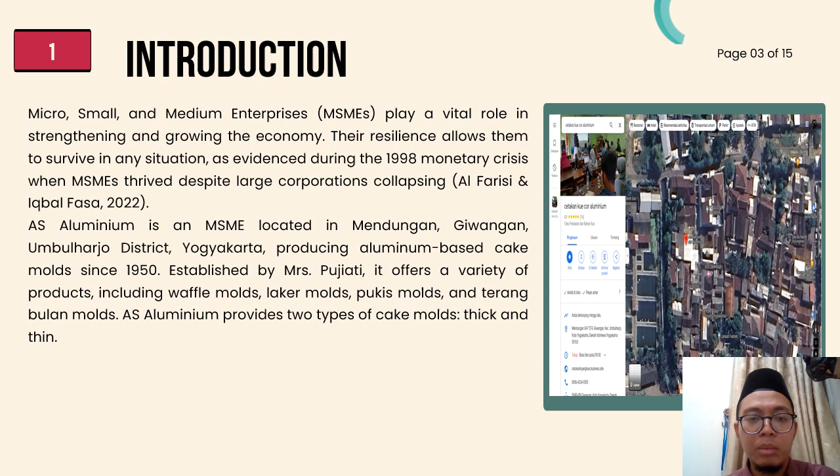In AS Aluminium, some product defects occur, leading to loss for the business. Defective products can negatively impact the company's reputation with customers. To address this challenge, incorporating sustainability goals such as responsible consumption and production can help minimize waste and improve product quality. Additionally, enhancing decent work and economic growth through efficient production processes can reduce defects and support long-term business success.

Quality is the most crucial factor in achieving success and growth, both locally and globally. By integrating industry, innovation, and infrastructure, companies can foster technology advancement that improves production standards and reduces defects. Defects found in aluminum products include holes, rough surfaces, and unevenness issues, which can be addressed by adopting climate action and optimizing energy use in the manufacturing process, contributing to both environmental sustainability and product improvement.

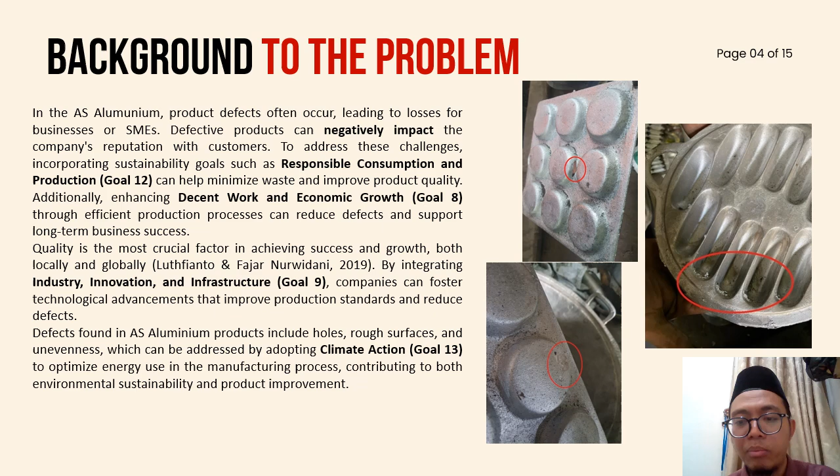As you see in this picture, this is all types of defects in the AS aluminum product.

The data show that both cetakan tebal and cetakan tipis have defect rates significantly higher than the target 2%. Cetakan tebal has an actual defect rate of 8.26%, while cetakan tipis shows 8.52%. This indicates a substantial deviation from the target, with cetakan tebal more than 6% and cetakan tipis more than 6% gaps. So this condition needs improvement in the quality control process to meet the desired standard.

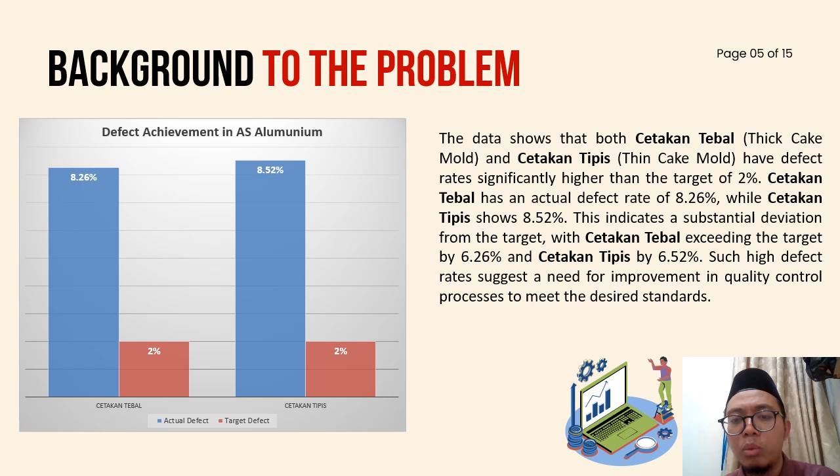Then in the next phase, measure phase, we collect the data from the defects and calculate the DPMO, defect per million opportunity, and the level of sigma.

Then in the define phase, we identify the defect in the production process, and then we try to improve using brainstorming and 5W and 2H, to determine how to improve the process to reduce the defect.

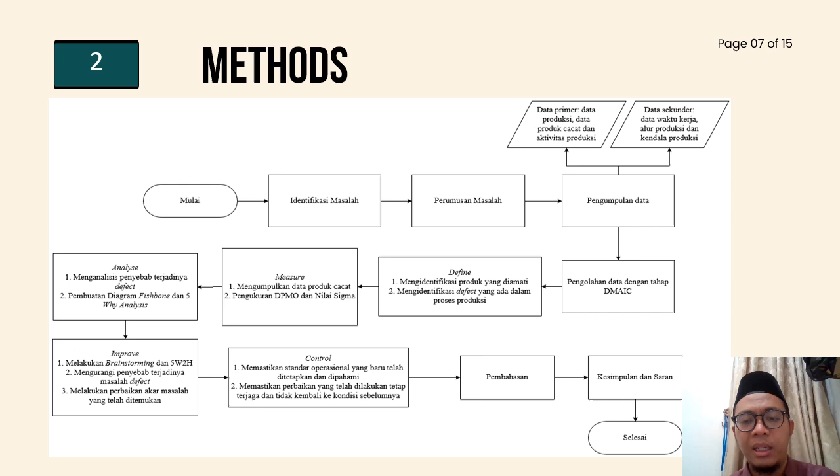Then in the last phase, the control phase, we make sure the SOP, standard operating procedure, the new SOP, is defined and implemented in the process. And then the last is conclusion.

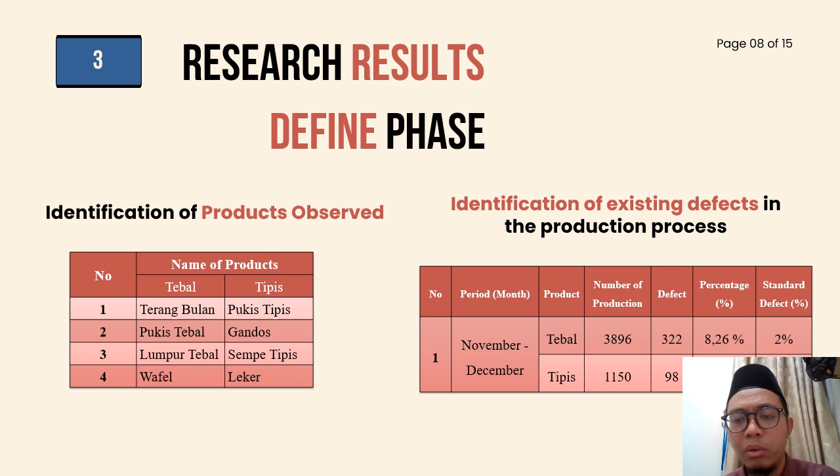In the first phase, define, we identify all the products where defects occur. For example, there are products with defects: terang bulan, pukis tebal, lumpur tebal, waffle, pukis tipis, gandos, sempe tipis, and leker. From the observation, we found all the products occur with defect rate more than target.

Then in the next phase, the measure phase, we calculate the DPMO, defect per million opportunity, and level sigma to know the baseline to conduct the improvement for the next level. From the calculation, the level of sigma for cetakan kue tebal is 3.42, and for cetakan kue tipis, the level of sigma is 3.4.

For the next phase, we conduct the analyze phase. In the analyze phase, we analyze the root cause of the defect. Using the 5-why analysis and fishbone diagram, we know how the defect arises in the production process.

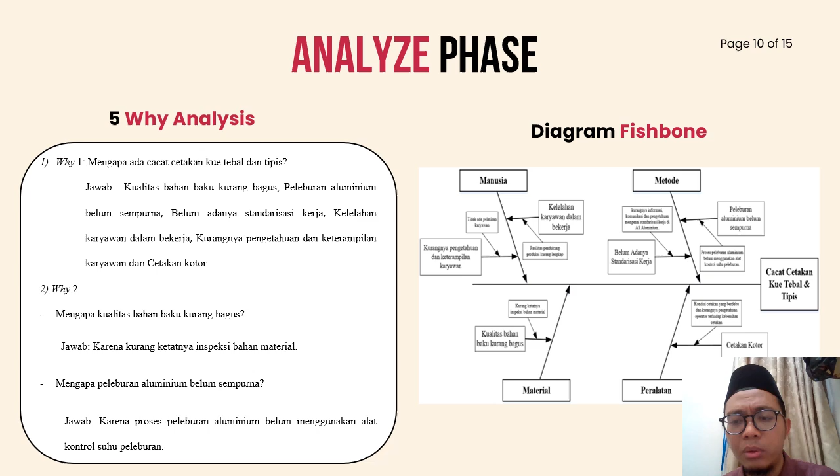From the material aspect, we found the raw material is not good. From the method, we know the process of melting the raw material is not perfect. And we found that lack of knowledge related to the process is one of the problems that raises the defect.

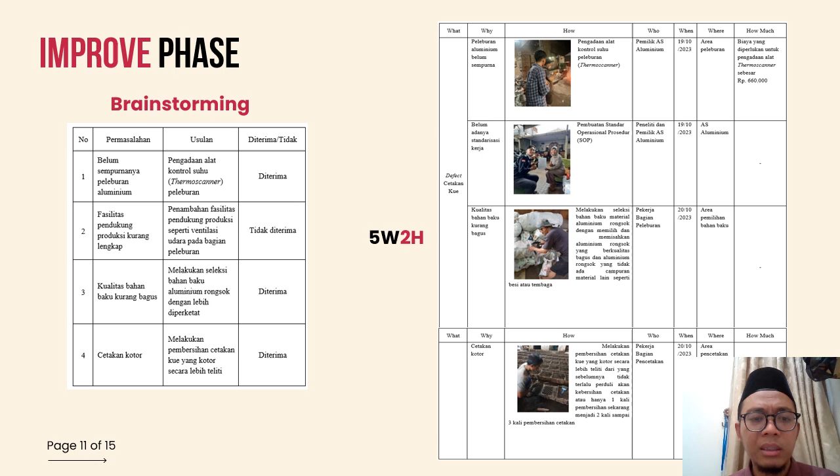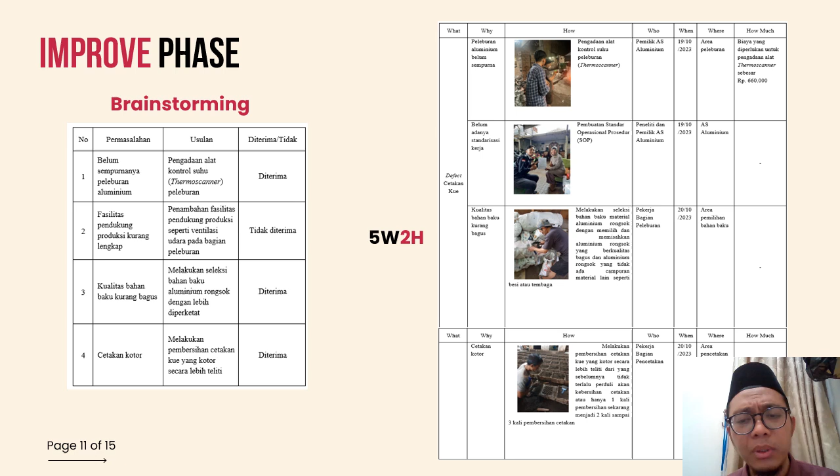And then selection of raw material is important, one of the important improvements to make sure all raw material is in the good specification. And then cleaning in the molding, to reduce the dirt that has caused the defect to occur in the process.

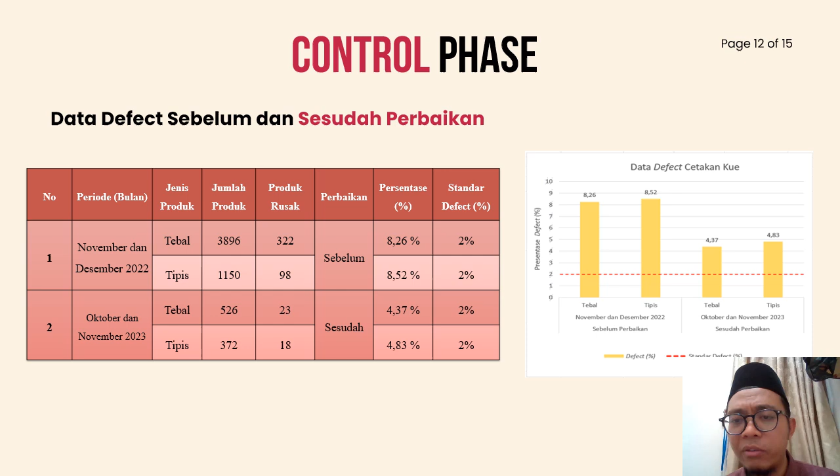After all improvements are implemented, we can show the result before and after improvement. From this table, we can show you all this. Even though the result is not enough to achieve the target, the result can be shown in this graphic as a reduction in defects: from 8.26 reduced to 4.37 for cetakan tebal, and for cetakan tipis from 8.52 reduced to 4.83.

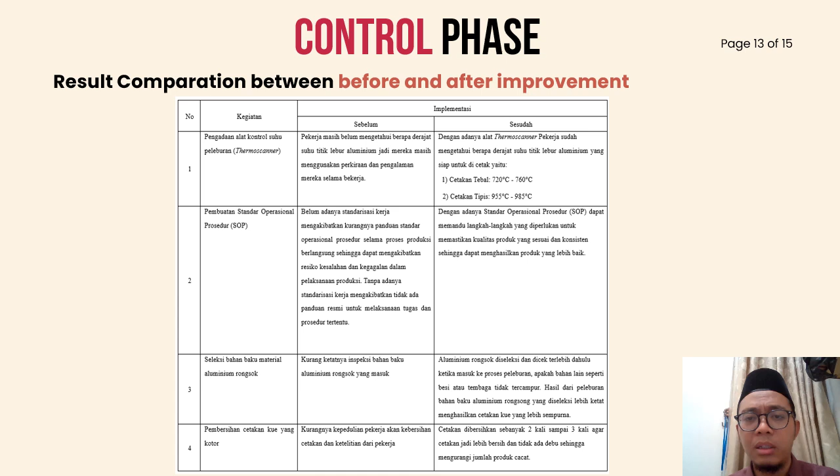To make sure this improvement will be implemented for the next time, we standardize all the new processes in the new SOP, standard operating procedure. So for the next time, this problem can be prevented from occurring. This is our implementation, our new SOP after implementing all the improvements.

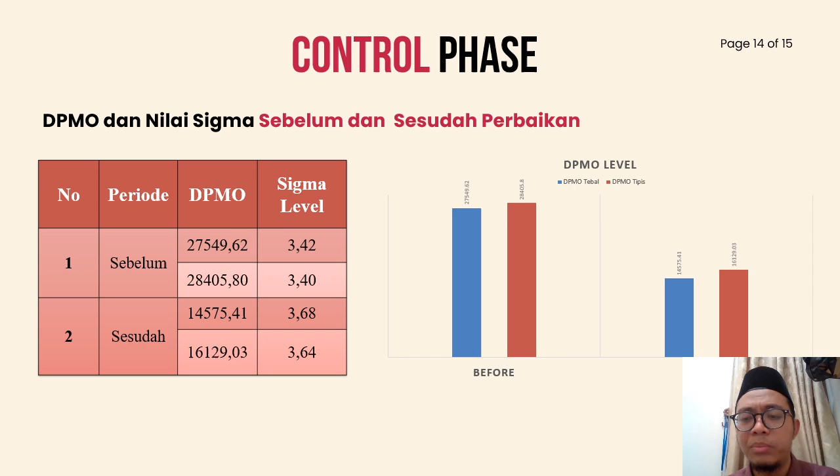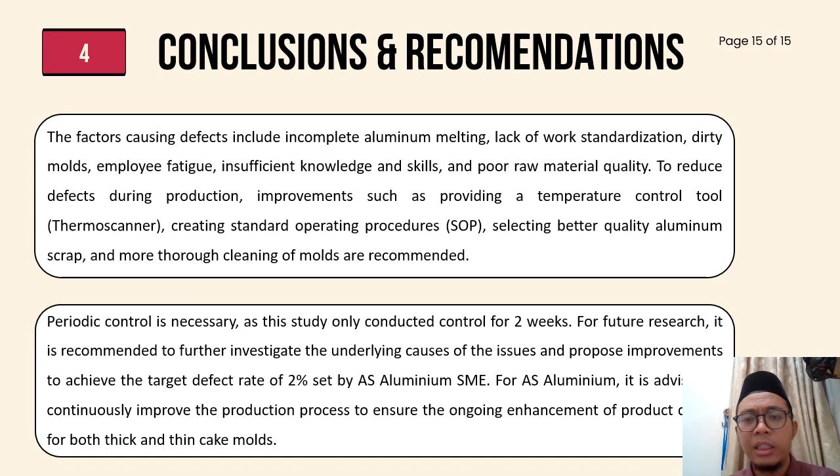For the conclusion, the factors causing defects include incomplete aluminum melting, lack of work standardization, dirty mold, employee fatigue, insufficient knowledge and skill, and poor raw material quality. To reduce defects during production, improvements such as providing temperature control tools, creating new standards, selecting better quality aluminum scrap, and more thorough cleaning of molds are recommended. And thank you.